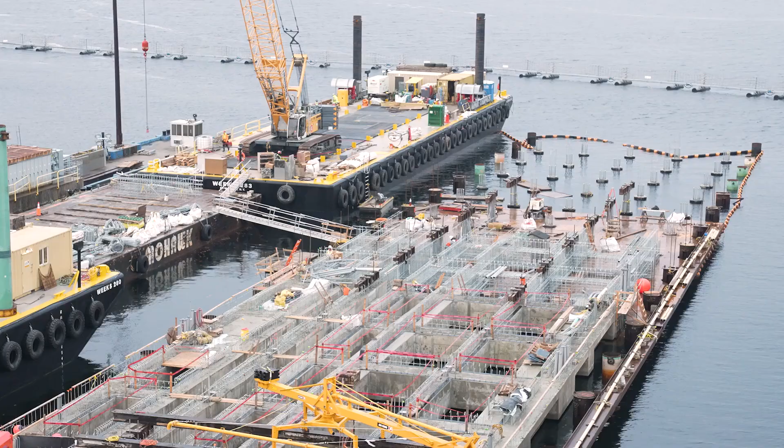Welcome to Weeks Marine, a multifaceted construction company built on a century of maritime tradition. Through years in the industry, Weeks has become a contractor of choice for public and private entities alike, helping build and maintain critical marine infrastructure vital to our economy and coastal communities.

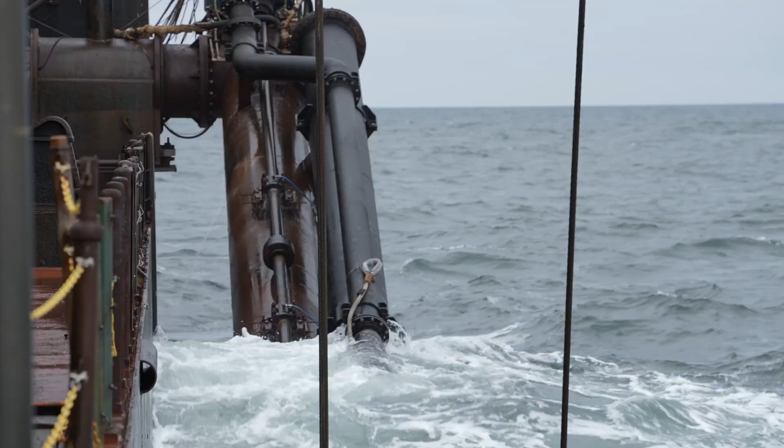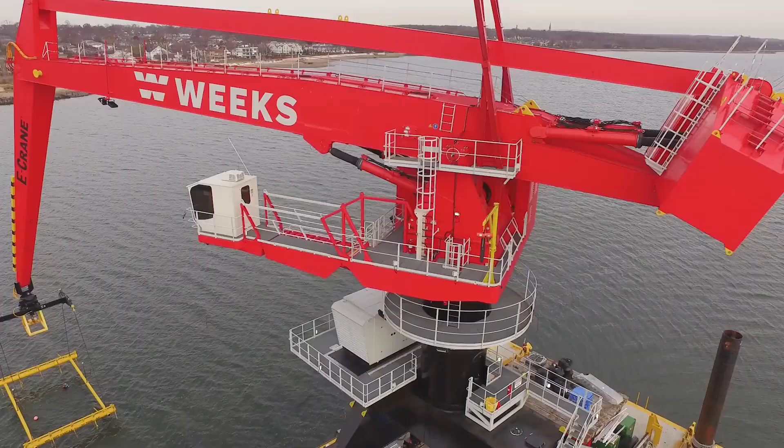The Weeks Dredging Division deepens and clears shipping lanes, anchorages, and berthing areas crucial to maritime trade. Our beach nourishment projects rebuild and replenish storm-swept barrier islands and shores. To safely produce our projects requires an extensive fleet of specialized ships, equipment, and expertise.

The very nature of the work puts us in close proximity with a variety of elevated or buried energy utilities. One of the obstacles to dredging here in the southern United States is dealing with the oil and gas infrastructure that is laid on the sea bottom or the river bottom.

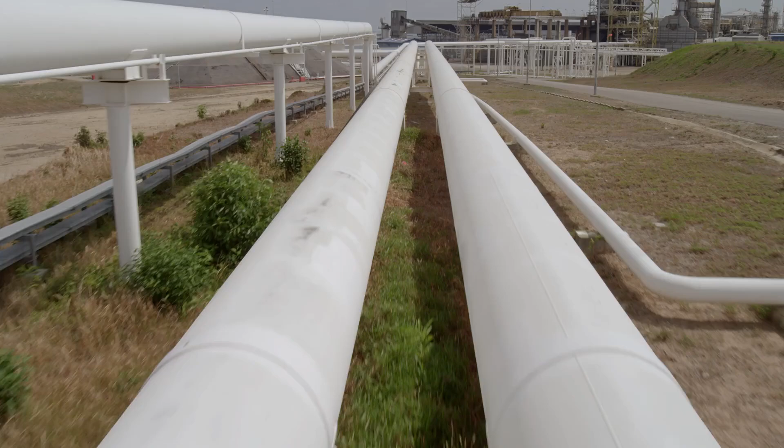From pipelines carrying gasoline, oil, or propane and other gases to transmission lines for fiber, electric, and wind power, the U.S. energy and utility transportation network runs in the millions of miles. It's a dense web of infrastructure operated by more than 3,000 different companies and growing each year.

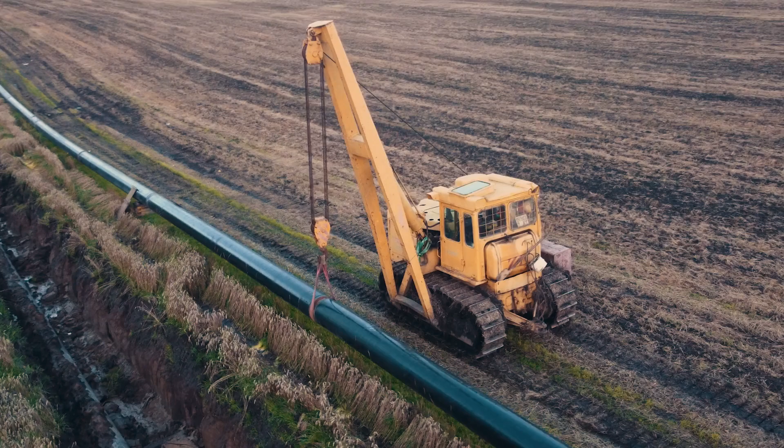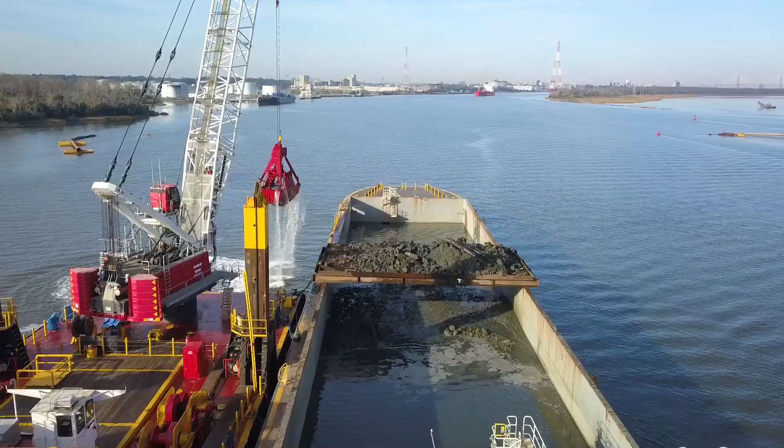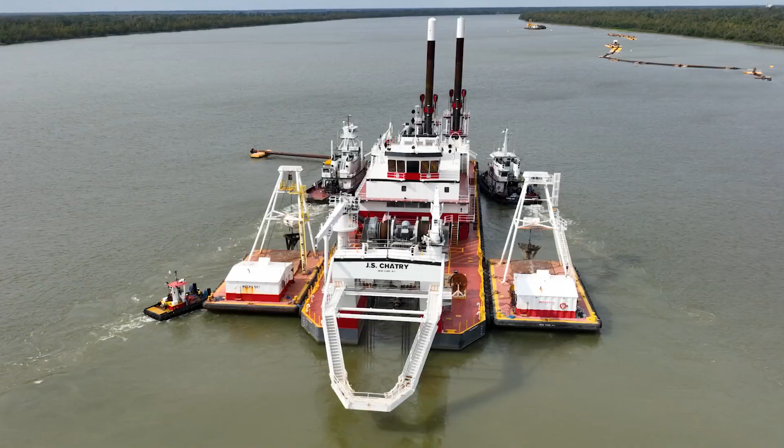Once we jump the pipeline with the dredge and we spud down 100 feet from the pipeline, then the representative can depart the dredge. Through diligent communication, caution, and vigilance, Weeks can and does work safely in this vast industrial network. Please pay attention as we cover our pipeline safety processes in this video. It's up to each one of us, every day, to do our part and work safe. Welcome to Weeks Marine and Pipeline Safety.

Planning work around pipelines. The most serious risks to human life and environment posed by marine pipelines are due to anchors, spud barges, and collisions of vessels. On this project right here, we're going to deal with all of those things. Proper planning for work around pipelines requires thorough communication and accurate information.

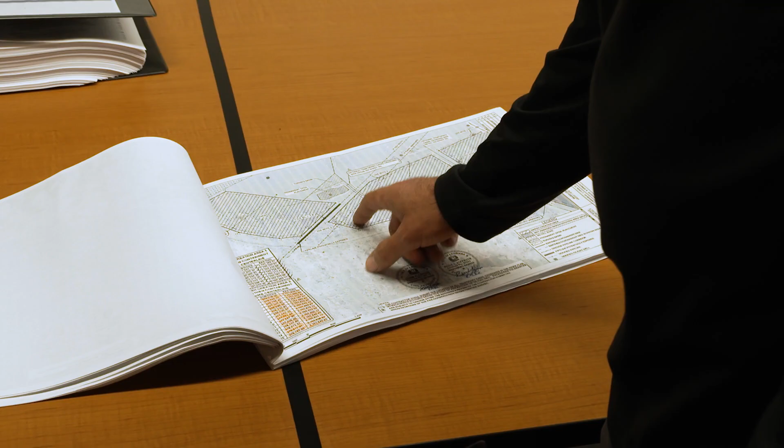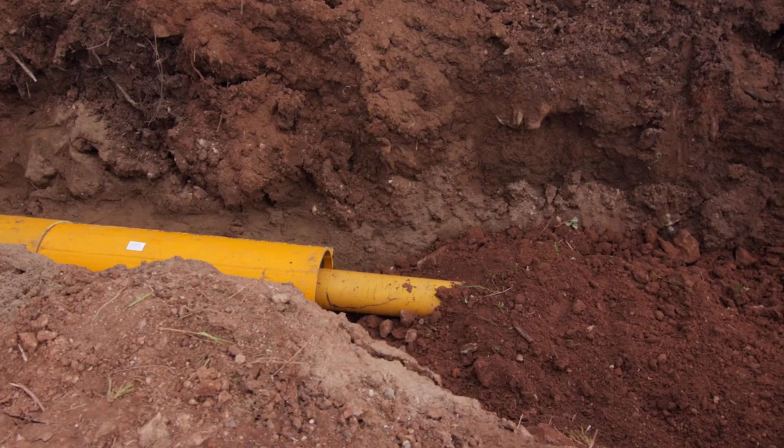We've got the two marsh creation areas here, and there's a verified live pipeline that runs in between the two. I know we've completed one calls for all of this. Have we reached out and got a point of contact with the representative for this company? Critical data regarding a pipeline's location, size, pressurization, and content carried must be obtained directly from the owners through 811, the National Call Before You Dig hotline. Hi, this is Rachel with Weeks Marine calling about some information on as-built.

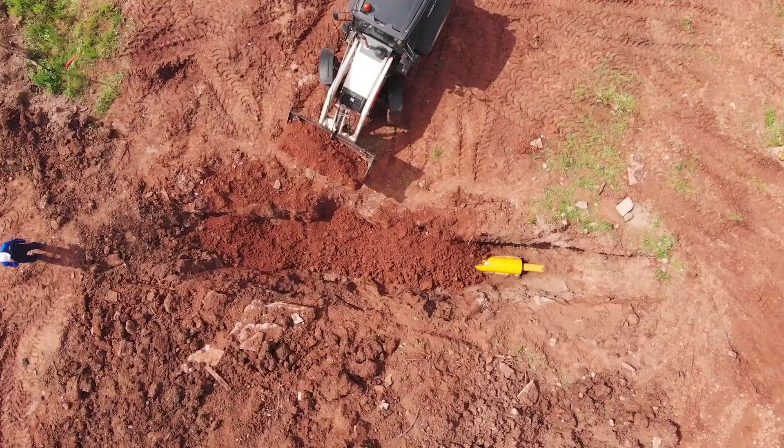We ensure we work from the latest data by having pipeline representatives on site to mark a utility's course. Then we re-verify in all areas of operational impact. That's our third-party survey out there, probing and trying to find depth of cover and understand where each of these pipelines is coming from. From borrow, mooring, and staging areas to fill sites, access zones, and transit paths, we leave nothing to chance. This is going to be our safe harbor.

So just to make sure, we went ahead and mag and probed every inch of this to make sure that there's nothing missing from the one calls or from the information from the pipeline company. Yeah, it's that pipeline. There's actually 3 pipelines in this area, and some of them are not buried so deep with material, so we got to flag these off with cane poles and keep our operators off of them.

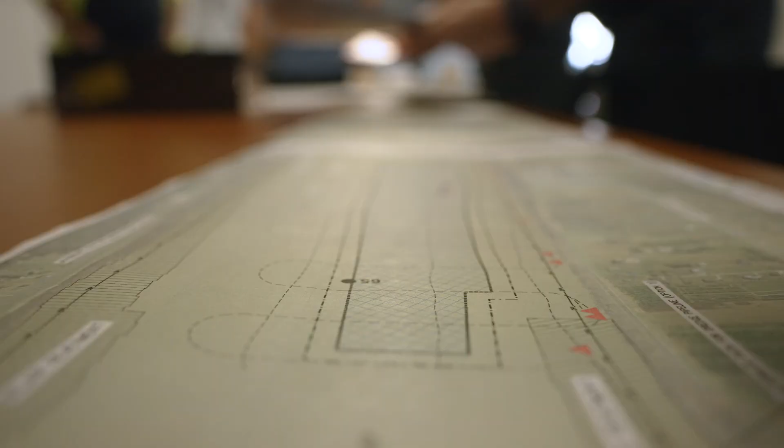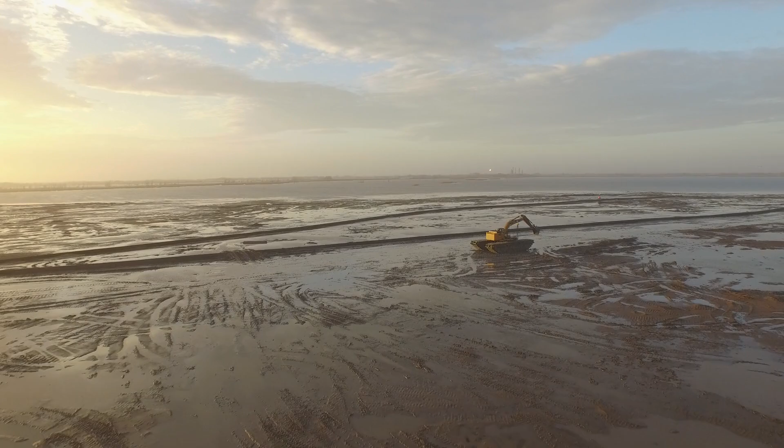With pipeline and utility proximity common on our jobs, emergency plans must be well thought out, discussed often, and fresh in mind. At the end of the day, it's about securing safety for our people and making sure that we keep the underwater infrastructure and above utilities safe.

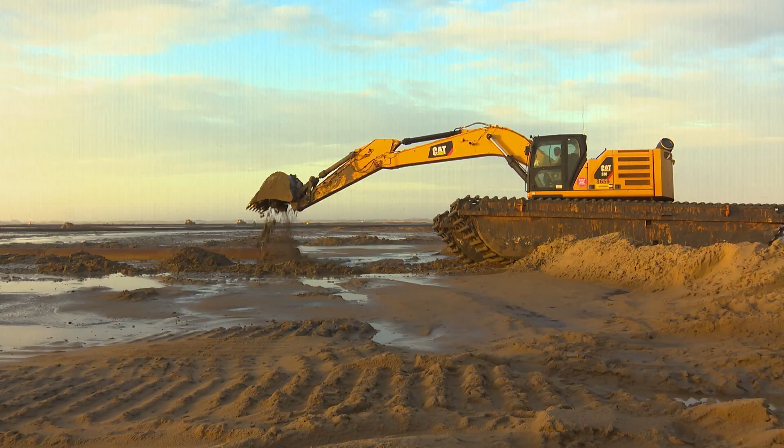This utility here, it wasn't on the plans and specifications. We're going to halt all operations in this area until we can get this identified. We also need to let the owner of the contract know that this utility wasn't on their plans and specs. Communication from the field to our operators, vessel crews, project management, and pipeline owners must remain constant. With safe operating parameters defined, we execute our plan.

Dredging near pipelines and emergency preparedness. All right, so we're about 24 hours away from getting to the actual location of where the pipeline corridor is. Once we dig up to the corridor, we're going to pick the cutter up, tie it off. We're going to do a calibration on the ladder.

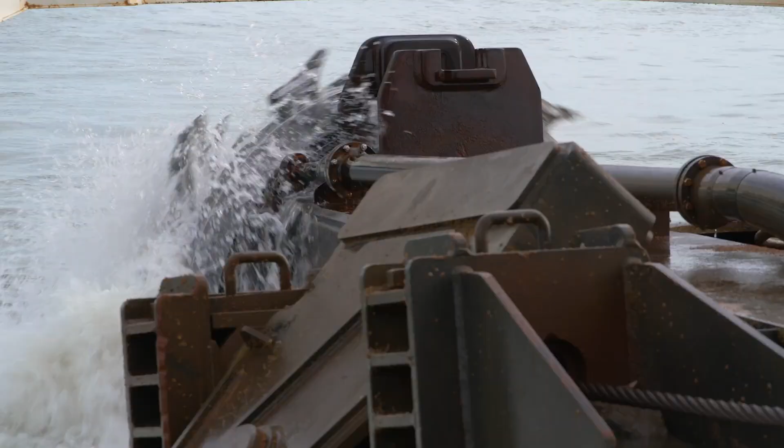We always have the representative with us. He actually witnesses the calibration of the ladder. We're going to talk about muster stations and everybody's assignments and be in good coordination with the Coast Guard and all of the authorities within the river.

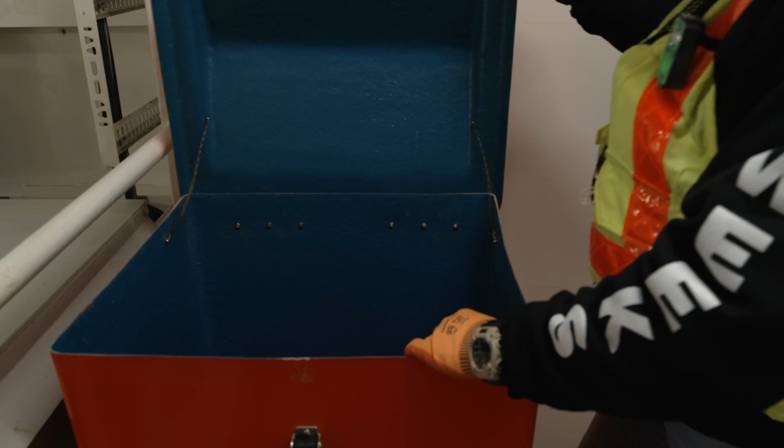Make sure that we have a good plan of action should anything occur. Prior to dredging over active pipelines, we review plans and make preparations. It starts with our own emergency response drills. This is our station bill. I go over this with the crew weekly; it tells exactly what they need to be doing at any emergency. Fire drill, man overboard, abandon ship drill.

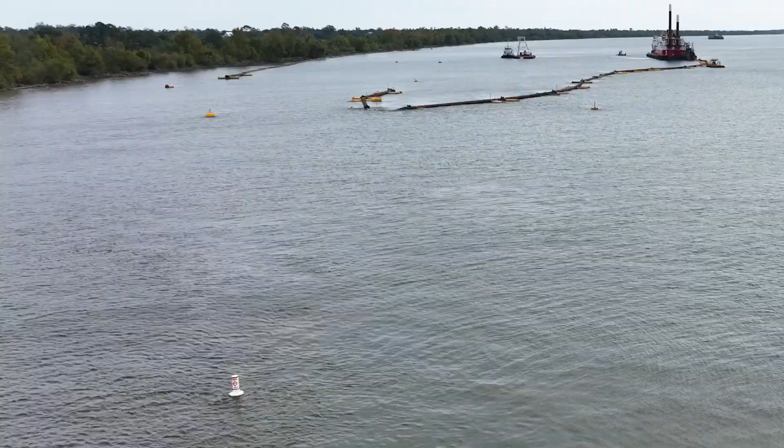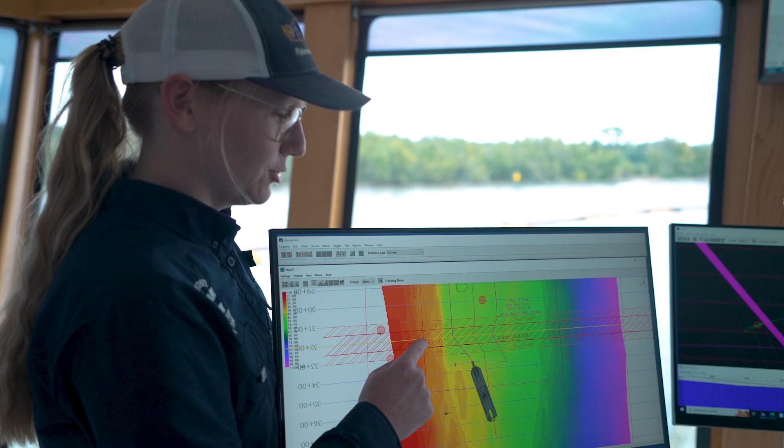Before digging within 1,000 feet of a pipeline, we place Coast Guard approved buoys outside tolerance or buffer zones. This orange hatching is 100 feet on either side. Whenever you reach that, that's where you will not spud down at all. Beyond that is the red, that's where the cutter will be tied off at. So 100 feet up to it and then 50 feet up to it.

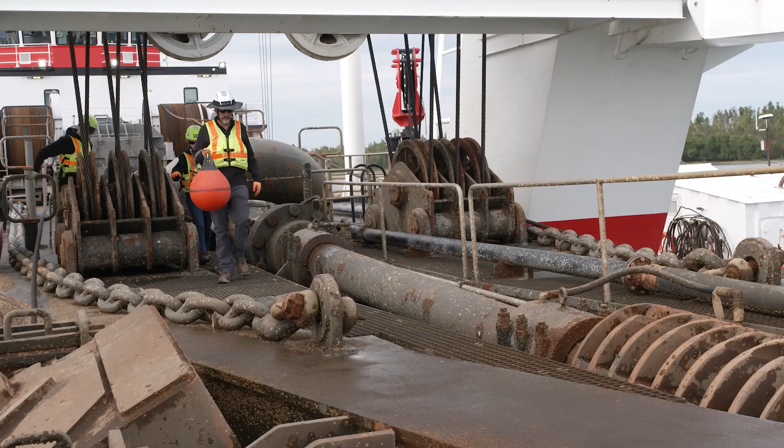We've also checked the tide on the dredge. Everything has been verified. The draft gauge and sensor has been checked and verified. Cutter calibration occurs in 10-foot increments using a cabled buoy attached to the cutter head. Crew's about to enter the ladder. We're going to clip into the top of the ring, which is our most accessible point. So everything has been measured for the offset from the top of the cutter to the bottom of the cutter.

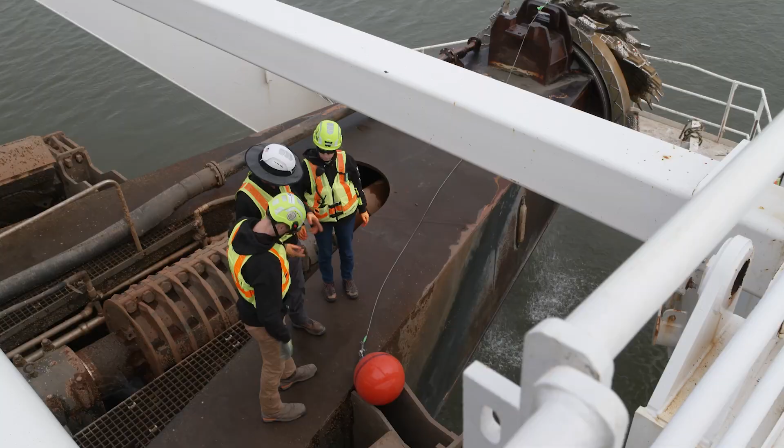Let's exit the ladder and we'll radio up and tell them to proceed with the calibration to 30 feet. Okay, we're coming down to 30 feet. 30 feet elevation on the ladder. Whenever we're digging over a pipeline, we know exactly where the cutter head is, what elevation it is at all times, and it is correct. Dialed in, the dredge crew can make its move, maneuvering the cutter head and spuds beyond the buffer zone.

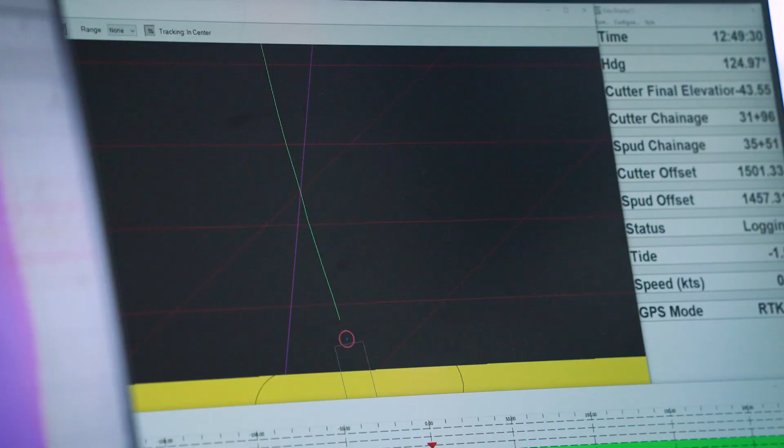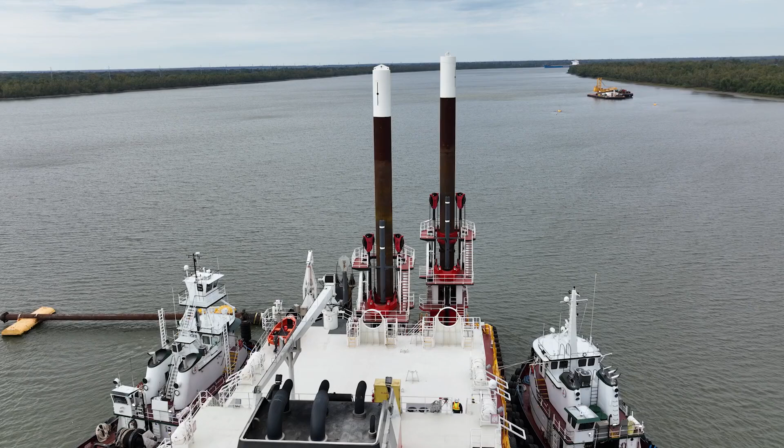This right here is going to end up right here. You'll see it on this screen here. When you see the yellow line, there it is. That's the pipeline. Get ready to drop the spud when I tell you to. Go ahead, drop it. David, let's go ahead and hook the pipeline up.

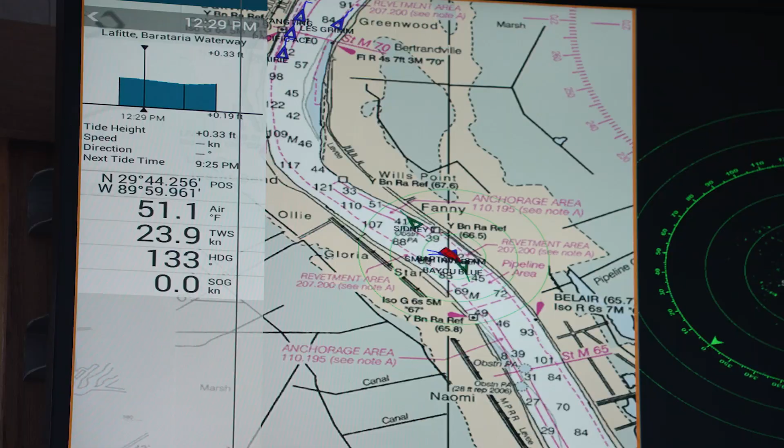Emergency response. The most important thing if there is a pipeline strike is to get our people to safe harbor and also all operations cease. Even with every caution and due diligence taken, unknown or unmarked pipelines exist, creating risk. Charles, looks like we hit something. Hit the all stop button. Mayday, mayday, mayday. This is the Dredge J.S. Chatry.

Spotting the signs of a leak and taking proper action can make life and death differences or avoid environmental catastrophe. Signs of a leak could be continuous bubbling, blowing, or hissing sounds, a rainbow sheen or colored oily residue on the water, or a gaseous smell around an area. An active gas detector on site should be used to detect odorless natural gas.

Emergency response and pipeline precautions must be well rehearsed and deployed immediately if a leak is suspected. That includes cutting any potential ignition source. We all have cell phones. That's the number one thing you do not want to use. Make sure your cell phone is in your pocket. Do not utilize it. Motors.

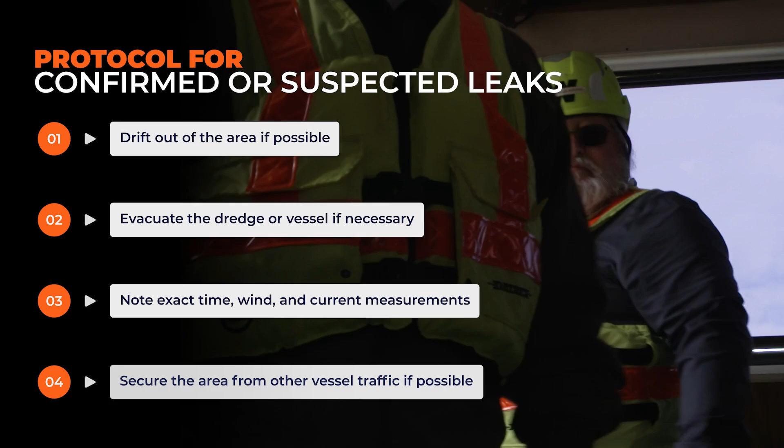In the event of a strike, try to drift away from a leak and evacuate the dredge if necessary. All right, come on, let's go. Grab the EPIRB and let's get off here. Contact the proper emergency authorities and make a note of details like exact time, wind direction, and current. Secure the area if possible. And remember, we take every precaution to prevent a pipeline strike, but must act instantly if one occurs.

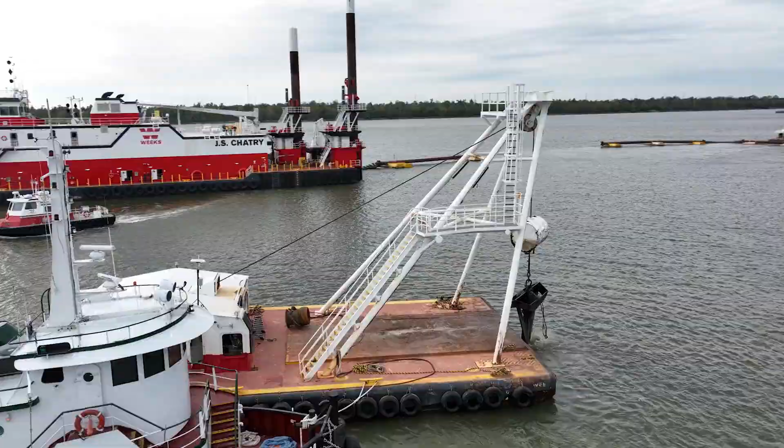We have a third-party survey company working actively in this area to identify each one of these anomalies. Through thorough planning, communication, and corroboration, we work safely around pipelines. Everything's been verified. We know exactly what the depth of cover is and exactly the locations. We check and confirm every detail, identify all concerns, and mitigate risk. We'll all be watching every move everyone makes. Put all our heads together and we get it done safely and efficiently.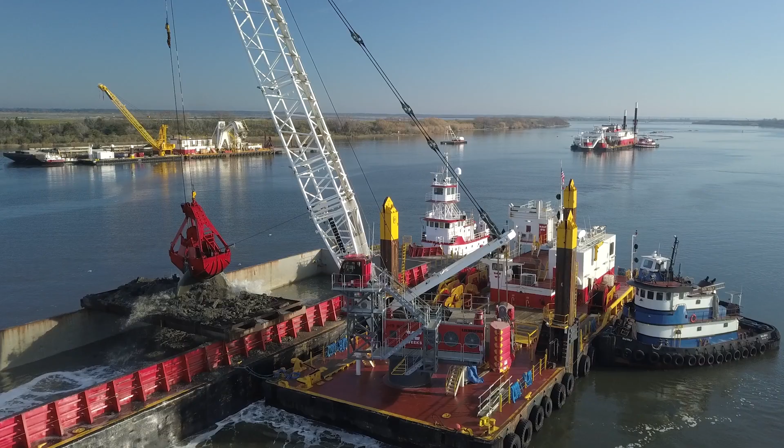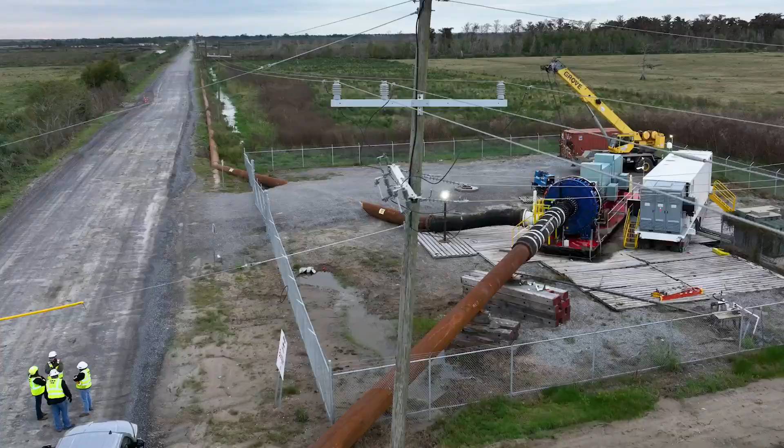All to safely execute our work with accountability and transparency between vessel and shore, project and pipeline ownership, and local authorities within the U.S. Energy Utility Transportation Network. We've reached out to Vessel Traffic Service, the U.S. Coast Guard, and the River Pilots Association. We're giving them daily updates.

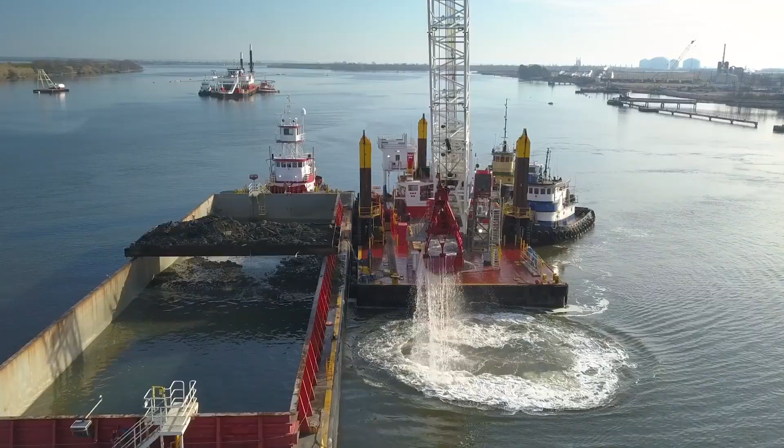And as the challenge grows with each mile of new pipe installed, Weeks stands ready for the opportunity, confident in our people, our process, and our dedication to safe work. Thank you for your attention and welcome to Weeks Marine.